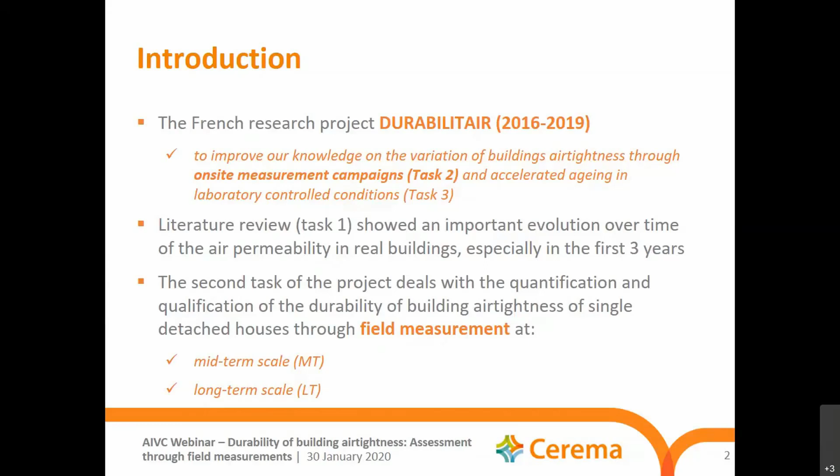In order to evaluate the durability of building airtightness in real conditions, we have conducted midterm and long-term measurement campaigns based on two samples of single detached low-energy dwellings. For both samples, all dwellings were measured upon completion, and treatment of airtightness was well known in order to reduce uncertainties about main factors impacting the building airtightness. The measurement upon completion will be referred as measurement N0 in this presentation.

And regarding the midterm campaign, which aimed at investigating the yearly evolution of building airtightness over a 3-year period, we have selected a sample of 30 new single-detached low-energy houses, all measured upon completion, and the airtightness of each dwelling was measured once per year over the 3-year period of the project. These measurements are referred as N1, N2, and N3 respectively. Besides, 5 buildings of the sample were measured twice per year in order to investigate the impact of seasonal variations, and for 6 dwellings, the airtightness of an installed window was measured once per year over the 3-year period.

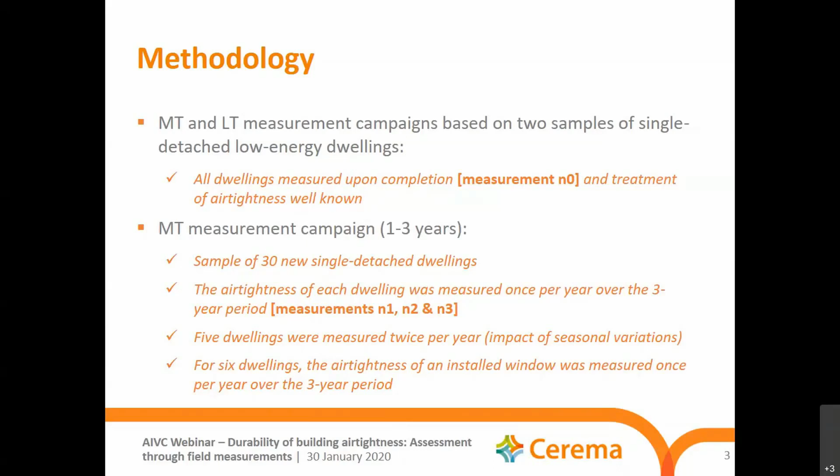For the long-term campaign, which aimed at characterizing the evolution of building airtightness over a longer period, around 5 to 10 years, a second sample of 31 existing houses was selected, and all were measured upon completion. The dwellings were constructed during the last 10 years. The airtightness of each dwelling was measured once, and this measurement is referred as measurement NX in this presentation.

Regarding the measurement protocol used in this study, it was based on the literature review that was conducted by Valérie and that was presented earlier by Valérie. We have used mainly the standard ISO 9972 and its French implementation guide. In addition, we have used requirements for the measurement conditions in order to reduce uncertainty due to measurement procedure. For example, all measurements were performed under the same conditions as the first measurement upon completion, both in pressurization and depressurization, with the same building preparation, same testers, same measurement devices.

Detailed qualitative leakage detection was performed at each measurement, and questionnaires for occupants were filled at each measurement in order to identify their action on the building envelope, like drillings to fix furniture or replacement of components. In total, 140 measurements of building airtightness were performed for midterm and long-term samples.

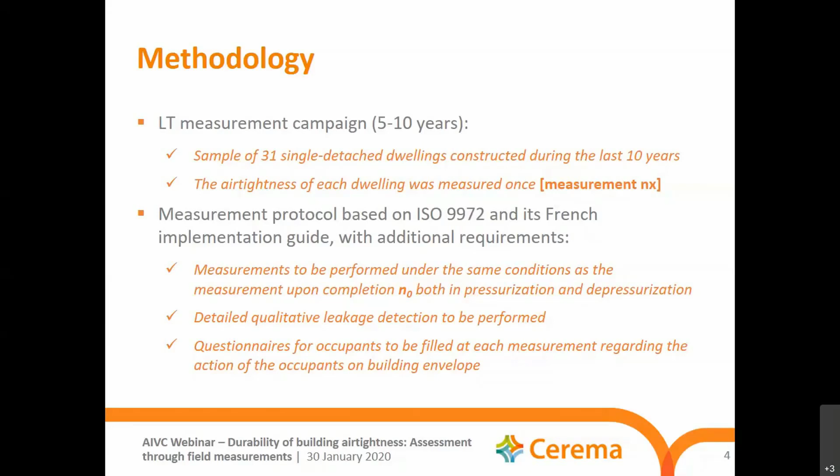I will present now the main results of this study, and I will start by this figure, which shows the distribution of buildings according to the year of construction. For the midterm sample shown in blue, dwellings were constructed mainly in 2014 and 2015, and the first year measurements, N1, were performed from 1 to 3 years after the measurements N0, with an average time span of 1.7 years.

Indeed, the measurements were delayed due to difficulties in finding occupants willing to be involved in a 3-year-long measurement campaign. And therefore, in order to compensate this delay, the average time spans between the following measurements were slightly lower than 1 year, with 0.7 years between N1 and N2 and 0.9 years between N2 and N3.

For the long-term sample shown in orange, dwellings were constructed between 2009 and 2015, and all measurements NX were conducted in 2017, from 3 to 8 years after the building completion and the measurement N0, with an average time span of 4.6 years between N0 and NX. Only 9 houses were older than 5 years in this sample. As for the midterm sample, we had difficulties finding houses fulfilling selection criteria with volunteer occupants.

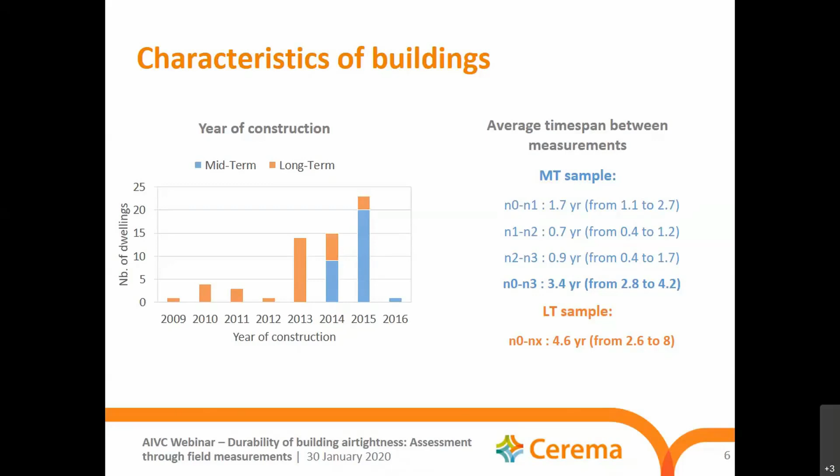Now, this figure shows the distribution of buildings according to the main material and type of air barrier. For the midterm sample shown in blue, all houses are built of masonry with interior insulation, and the airtightness is treated the same way, through plasterboards and mastics at the inside facing of the walls, referred to as air barrier C on this figure.

For the long-term sample shown in orange, the majority of houses are also built of masonry with interior insulation. We also had 6 wooden houses. The airtightness of masonry houses is mainly ensured by coating on the masonry, called air barrier B, and the airtightness of the wooden houses is ensured by the vapor barrier, called air barrier A.

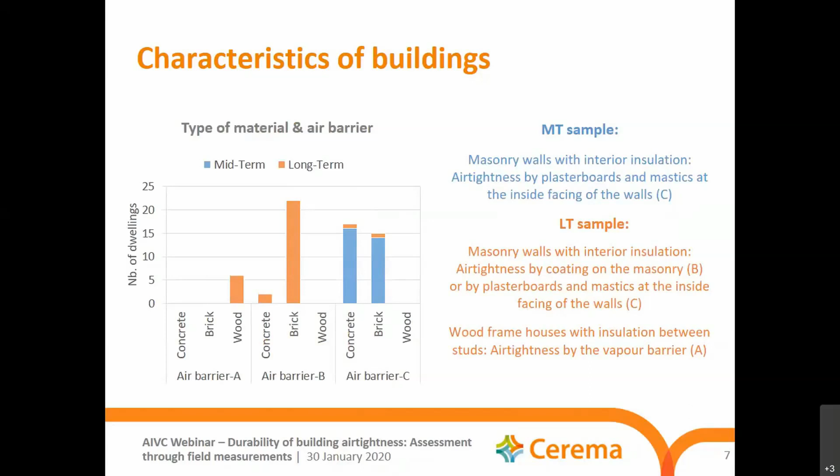Now I will present the results of the air permeability measurements, expressed here according to Q50, which is the air leakage rate at the reference pressure difference of 50 Pascal, which is more reliable than the pressure at 4 Pascal, as mentioned earlier by Valerie. This figure shows the box plots of the air leakage rate Q50 for different measurements of the midterm sample. For the measurements N0, tests were performed by either pressurization or depressurization, unlike the other measurements N1, N2, and N3, where tests were performed by both pressurization and depressurization.

So for the midterm sample, we can observe a significant increase in the mean air leakage rate Q50 between the measurement N0 and N1 by almost 60 cubic meters per hour, which represents an increase of 18%. After the measurement N1, we observe a stabilization of Q50 at N2 and N3.

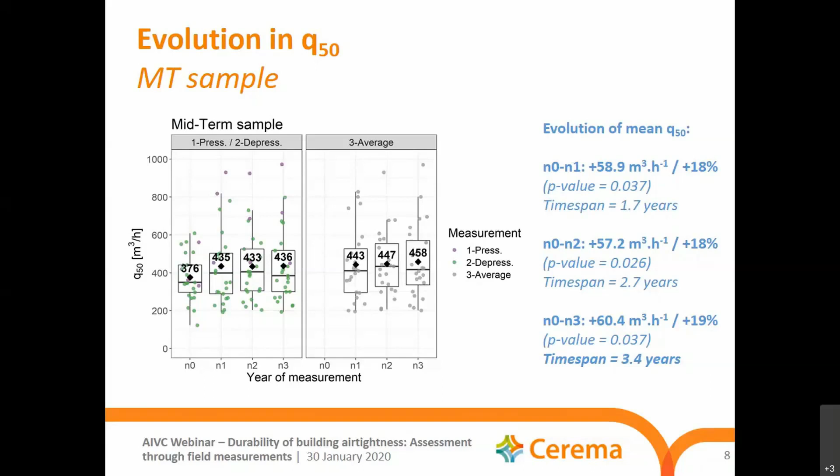Regarding the long-term sample, this figure also shows the box plots of the measured air leakage rates at 50 Pascal. As for the midterm sample, we observed similar results, with a significant increase in the mean air leakage rate Q50 between measurement N0 and NX by around 68 cubic meters per hour, which represents an increase of 20%.

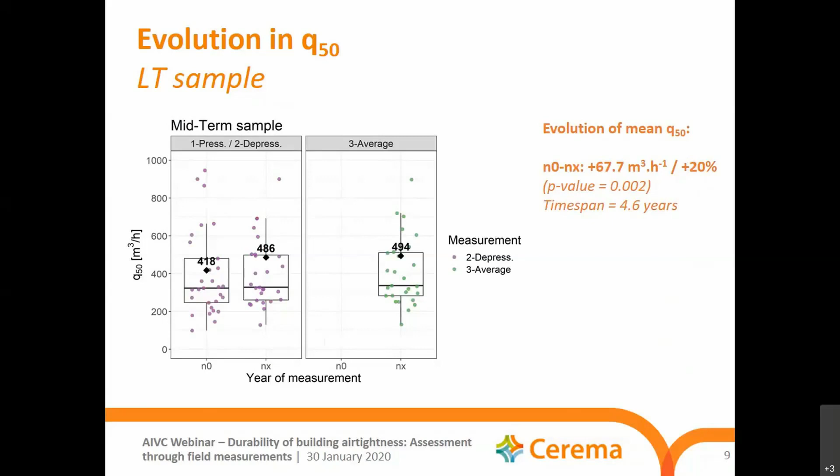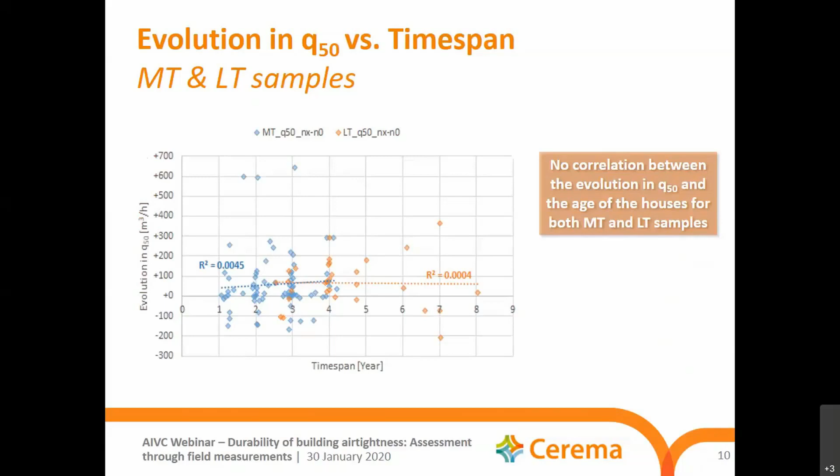Variations during the first 2 years may have several origins, including the actions by the occupants when they move into the building, like installing furniture or picture frames, and also the first heating of the buildings. In order to go further in understanding the variation of building airtightness, we have examined the evolution of air leakage rate Q50 regarding buildings' main characteristics and modifications by occupants.

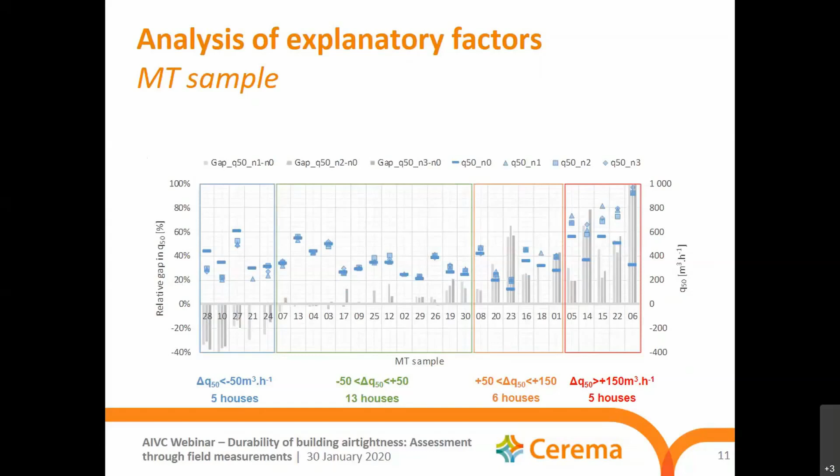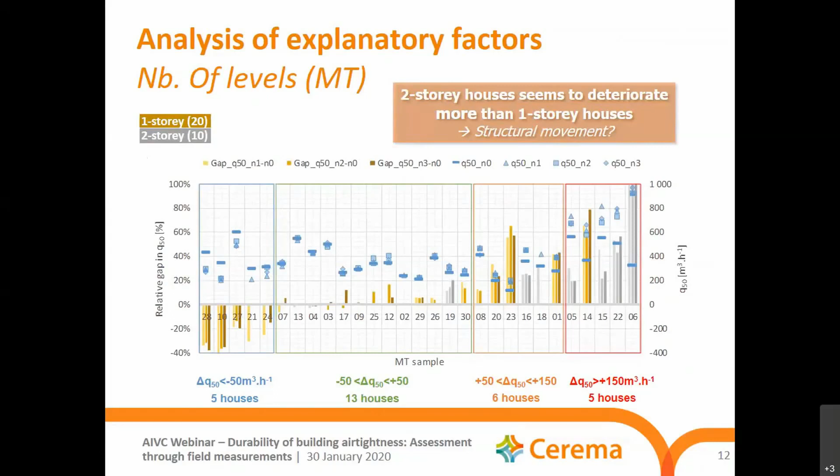First, the number of levels. We are generally observing an upward trend in the air leakage rate for the 2-story detached houses shown in gray on this figure. For these houses, the airtightness seems to deteriorate more than in 1-story houses. This can be explained by structural movement due to foundation settlements.

The evolution of the air leakage rates also seems to be sensitive to the type of roof. If we look in particular at the 2 houses with exposed wood frame on this figure, for dwelling number 6 in the red box, the house had become much leakier, with an increase by 180%, mainly because of leakages appearing at the junction between the wood and the plasterboard due to the shrinkage of mastic.

While for the dwelling number 19 in the green box, the air tightness has remained almost stable. Knowing that both houses are tightened by the same method, the conditions of implementation of the air barrier seem to have an impact on the durability of the air tightness.

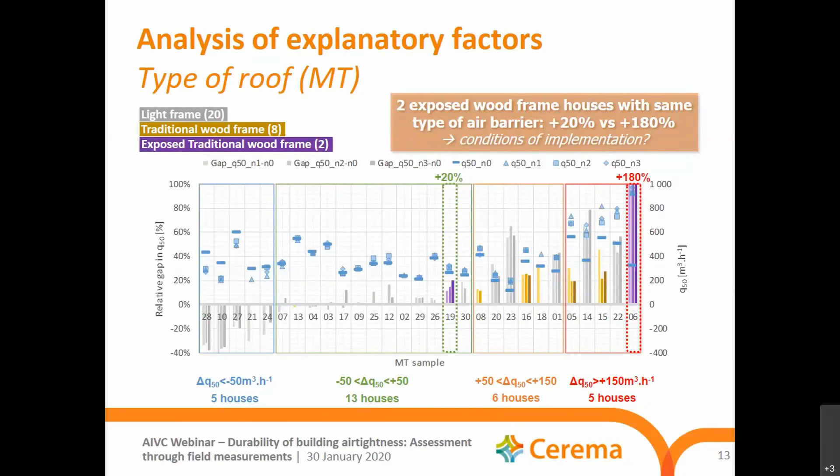And finally, we observed that the air tightness of the 6 wooden houses of the long-term sample, shown in gray on this figure, remained stable and even improved for 2 wooden houses. It is interesting to note that laboratory testing has come to the same conclusion on wood structure. This may be due to the expansion of wood with the humidity, which would expand the wood and therefore reduce leakages.

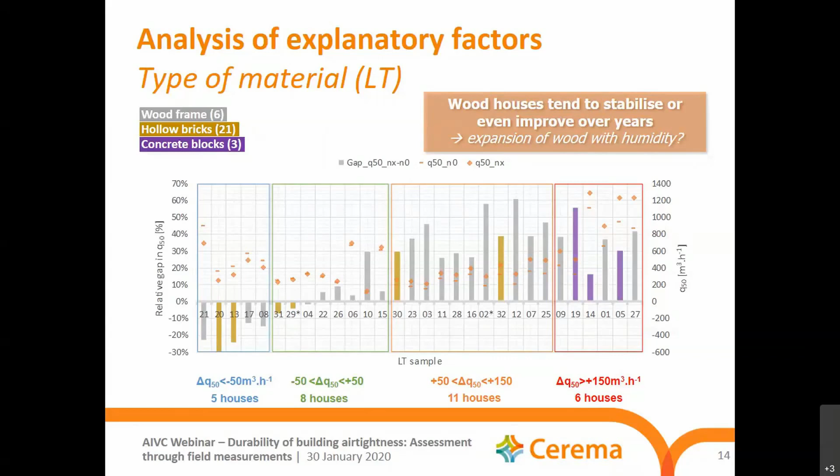Regarding the evolution of leakages, this figure shows the evolution in the number of observed leakages between various measurements. On the left y-axis, you can see the evolution in the number of leakages for the midterm sample, for different categories of leakages, shown from category B to category H. And on the right y-axis, you can see the evolution in the air leakage rate Q50. The houses on the x-axis are sorted in ascending order of the evolution in Q50.

First, you observe a significant increase in the number of leakages for doors and windows, for the electrical components, for the penetrations through the envelope, and also for the junctions between walls and doors or windows.

However, the multiple linear regression that has been performed has shown that the evolution in Q50 was not correlated with the evolution in the number of leakages. As you can see on this figure, for some houses with a decrease in Q50, like house number 10 in the blue box, there is an increase in leakages equivalent to houses with a strong increase in Q50, like house number 6 in the red box, for example.

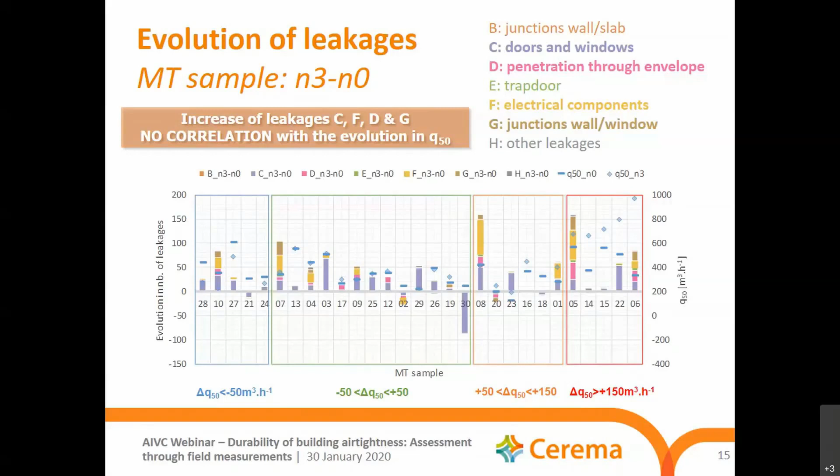This brings us now to the main conclusion of this study. The durability of building airtightness of low-energy single-detached houses was assessed through two field measurement campaigns at midterm and long-term scales. The results showed the same evolution of the airtightness at midterm and long-term. Indeed, both samples show the same mean increase in the air leakage rate Q50, around 20%.

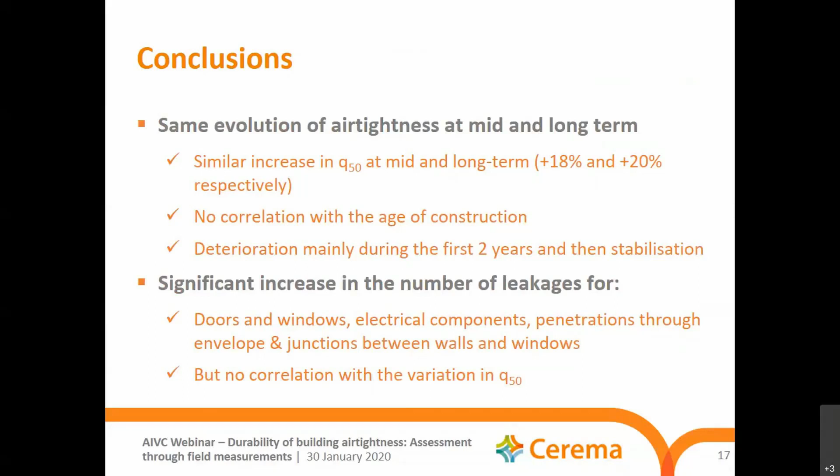Also, there is a lack of correlation of this increase with the age of construction. And the air tightness deteriorates mainly during the first 2 years, and then it stabilizes. Results also show a significant increase in the number of observed leakages. However, no correlation was observed with the variation in air leakage rate.

Several factors regarding building main characteristics and the modification of envelope were analyzed in order to explain the variation in air tightness, and results show no impact for constructor, type of barrier, of floor, of heating, and specific HVAC equipment. Also, no impact for seasonal variation, and the air tightness of wood houses tends to stabilize or even improve over years. Also, the two-story houses seem to deteriorate more than one-story houses.

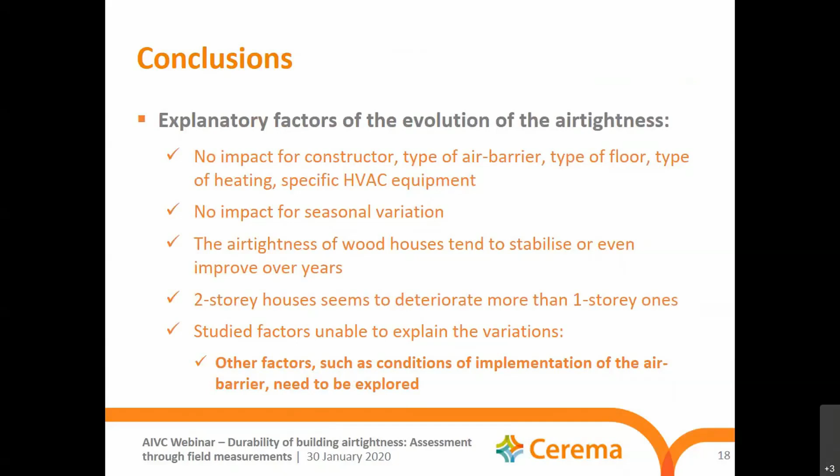In this project, gathered information has explained a part of the evolution in the air permeability. However, neither leakage detection nor building characteristics are correlated with the observed evolution in the air leakage rate. Therefore, there are probably other factors not considered in this study which have an impact on the durability of the air tightness, such as the environmental conditions mentioned earlier by Valerie, like the temperature or the dustiness, when the air barrier is implemented. So it would be interesting to investigate such parameters in future studies.